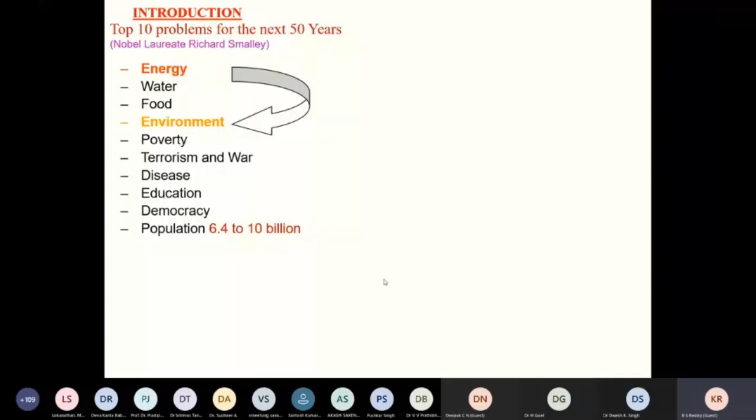So if you look at the future, the first three important things are energy, water, and food. Clean energy is an important aspect. Food is a major issue because the population is growing rapidly, with exponential growth. The required food needs to be produced in the most effective way, and the agriculture sector needs to be strengthened.

Apart from that, water is another important thing. Most water bodies in India are polluted, and even across the world. So potable water is important now. If there is unrest across the world, it could be because of these three: food, water, and clean energy. But for human survival, there's another important requirement: air.

Somehow we get air free of cost. We don't spend money on it, whereas we need to spend a lot of money on clean energy, food, and water. Though air is free, it's not clean air. Because of energy consumption, human activities, industrial development, and increase in population, the environment becomes less conducive for survival. So there's a lot of potential to develop technology to make the environment sustainable, cleaner, or green.

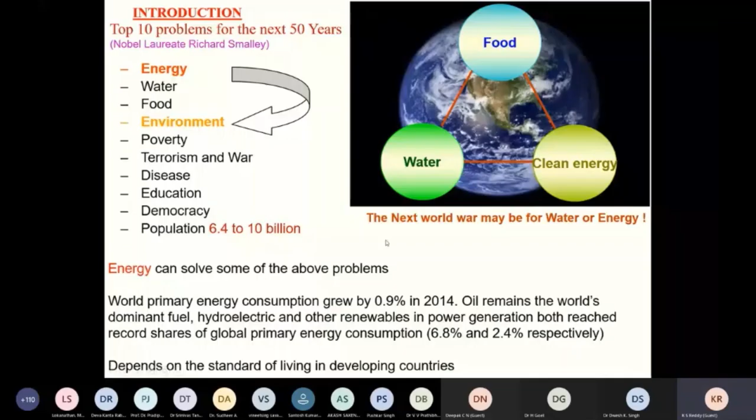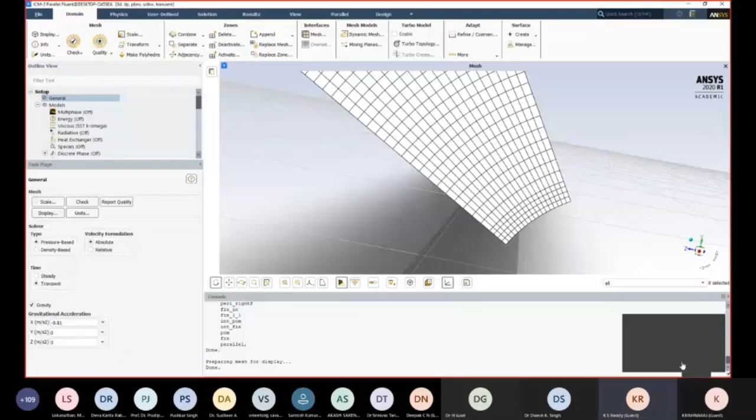Therefore, energy can solve most of these problems. Energy consumption is also rapidly growing day by day, mainly for three reasons: improvement in standard of living, massive industrialization, and population growth. These three reasons are mainly responsible for the increase in energy consumption.

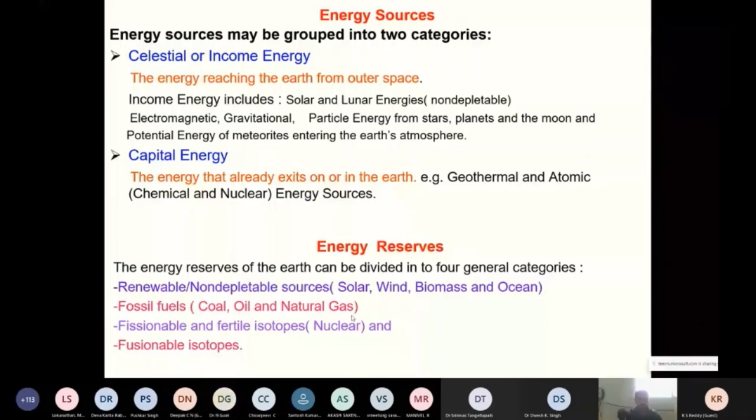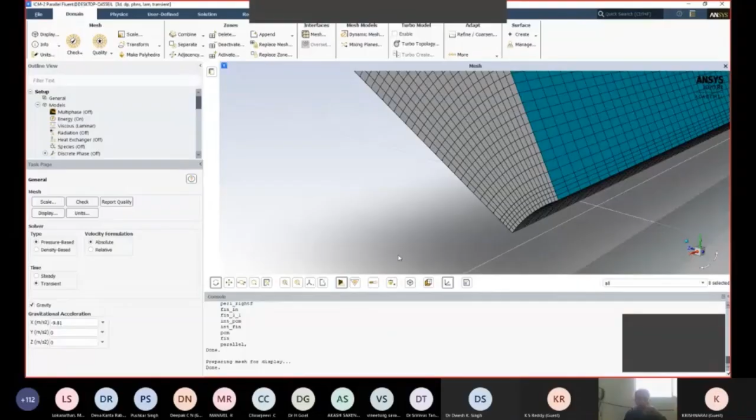If you look at the energy conversion system, which we call the energy system hierarchy, it is transformed into equipment and services. Energy sources, including fossil fuels (oil, gas, coal) and renewables (biomass, solar, wind) as well as nuclear, are transformed into energy carriers, or secondary forms of energy, which are then used for various applications. These secondary fuels or energy carriers include the most efficient forms of energy: electricity and liquid fuels.

So the sources are converted into energy carriers and subsequently utilized in equipment, whether for mobility—surface, aviation, or sea transport—or for buildings. The building sector is also an important area.

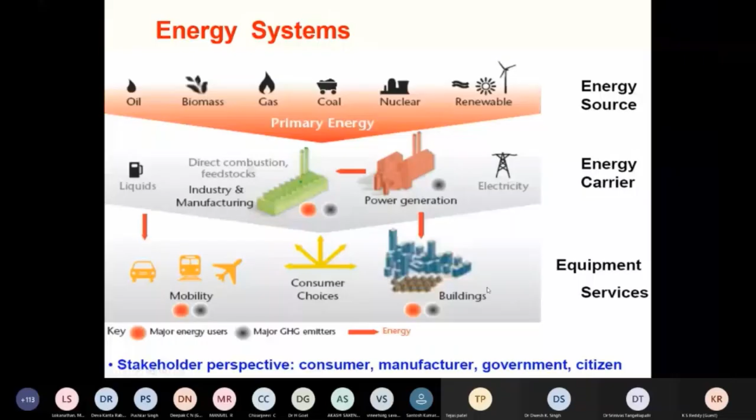If you look at the technological challenges, no single technology or policy can solve everything. There are different problems based on region, resource, market, preference, scale-up, technology, time, and infrastructure. Several challenges exist, whether for vehicle energy efficiency, biofuels or hydrogen fuel for mobility, or zero net emission buildings, since the building sector is also important as far as energy is concerned.

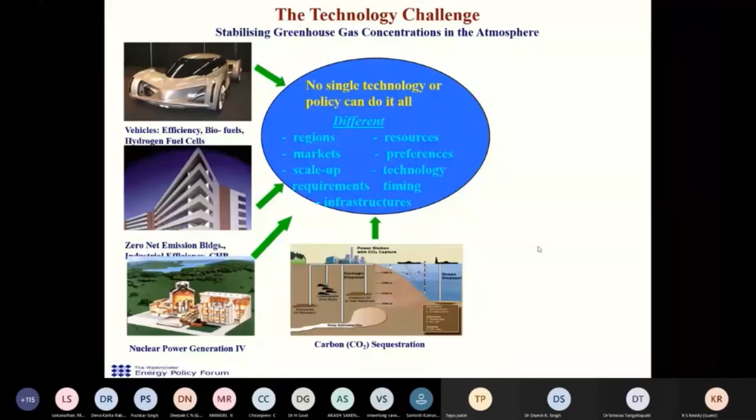So whether we go for industrial efficiency or CHP or any other thing, nuclear is another important aspect where 4th generation, 5th generation nuclear reactors are being developed. Pollution is a major problem, CO2 capture is a major issue, and CO2 sequestration is important. Advanced grids matter because transport, distribution and transmission are major aspects for high quality energy like electricity. Biofuels and power generation is another important aspect, and of course finally the renewable energy technologies.

So these are several challenges, and especially we are discussing the most important aspect, renewable energy technology, mainly solar thermal technologies.

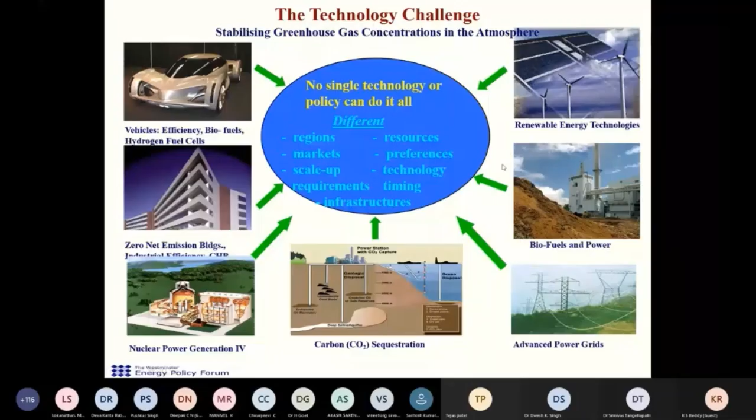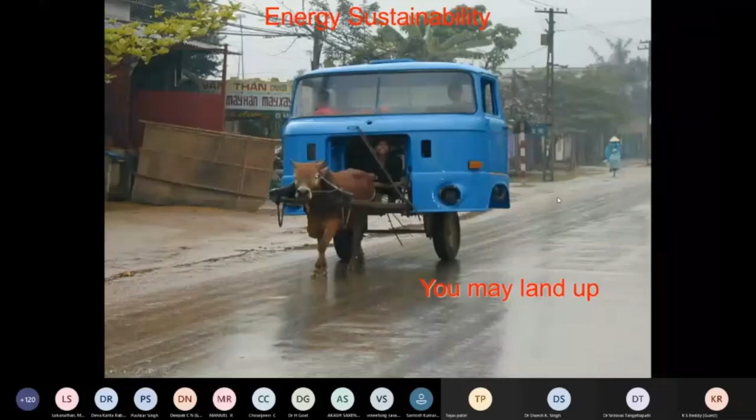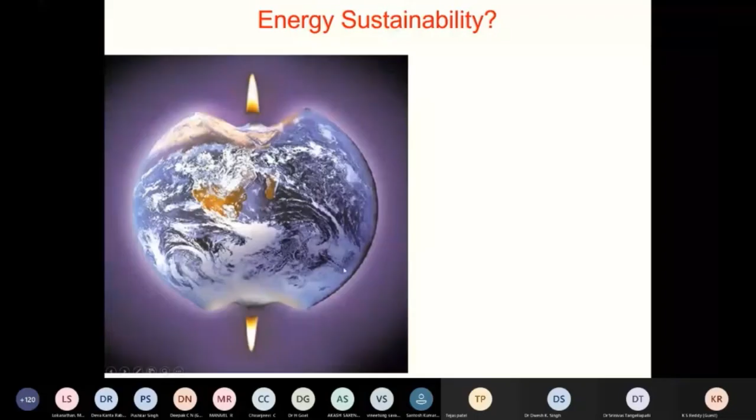Any imbalanced system is because the atmosphere is overloaded with pollutants, which results in imbalance. An overloaded system looks like this. If you put too much pollutants into the atmosphere, we face a lot of problems. So overloading the atmosphere with pollutants may be the same as any overloaded system you've seen on the right side. Therefore, energy sustainability is important because resources need to be used most effectively.

If you see these natural resources, including energy resources, and if you try to consume them like this without technology, they will become extinct after some time. Then this part will become empty, and the future generation will not have any energy sources. So we have to keep the required resources for their use.

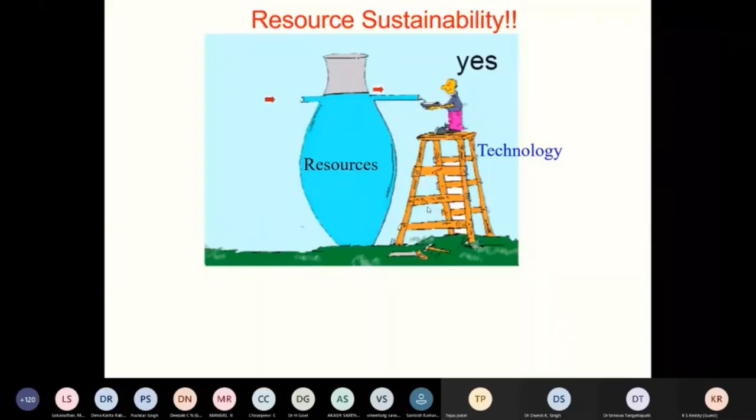It's important to develop an indigenous technology to keep resources for the future generation, and we can use our own share by developing this technology. That's why the future generation says there is only one Earth we have to take care of, please.

If it is energy resources, this technology is renewable energy technology. It's not just a tool, it's a renewable energy technology. You have to develop renewable energy technology in a more sustainable way to take our own share, keeping these reserves and resources for the future generation, and we have to take our own share.

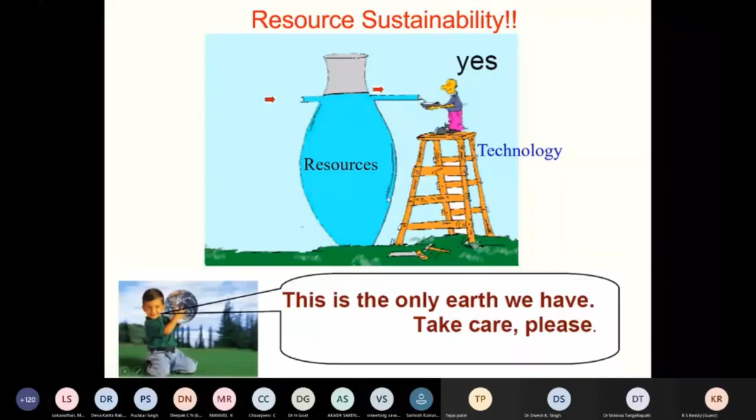If you look at energy reserves, which I have already mentioned, the present annual energy consumption involves fossil fuels - coal, oil and gas - with big blocks, and uranium. Looking at the present energy consumption rate, these reserves are finite. They may become extinct after these many years respectively: natural gas in 63 years, oil in 46 years, and coal in 119 years.

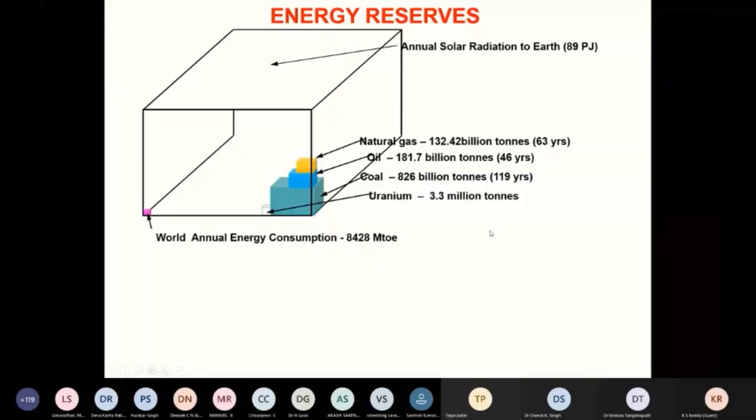Uranium for nuclear power is still unknown and not commercially used to a larger extent. But if you look at the top, there is abundant solar radiation available.

There are a lot of challenges and opportunities here. If you take this, there are three main components: concentrator, receiver, and support structure with tracking. This has to be tracked continuously.

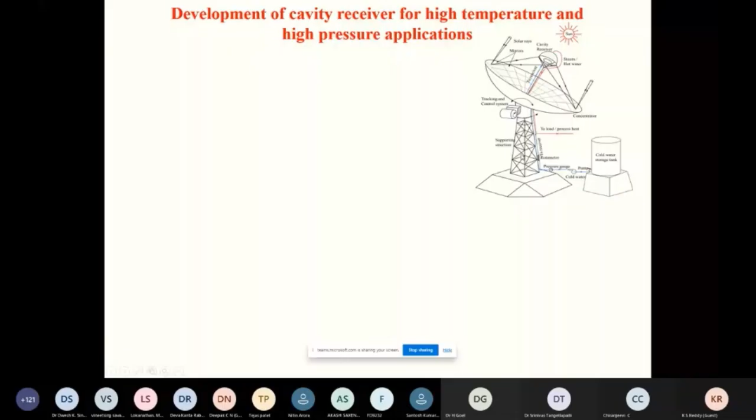The development of a cavity receiver for high temperature and high pressure application is a challenge, but there are a lot of opportunities in this. All CSP technologies, including parabolic collector technology, are most efficient with high concentration ratio and high operating temperatures.

If you look at this, there's a tracking mechanism, a receiver and mirrors, and of course storage tanks. The receiver plays a major role in solar thermal energy conversion and estimation of heat losses.

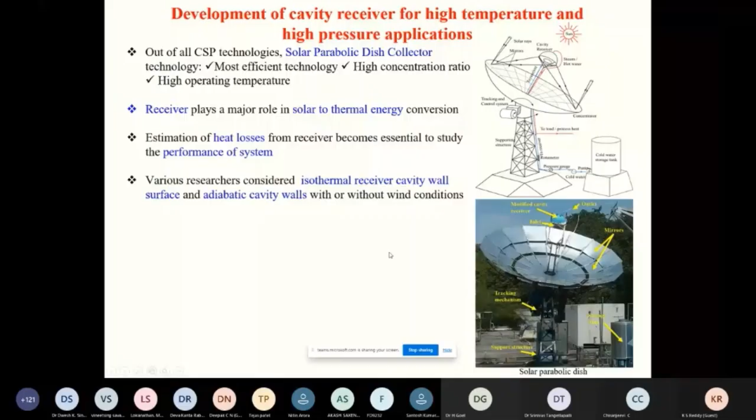The performance study is very important, and various researchers consider isothermal receivers, cavity receivers, adiabatic receivers, and so on. But we have developed a technology which takes care of superheated temperature up to 500 degrees Celsius and reasonably high pressures.

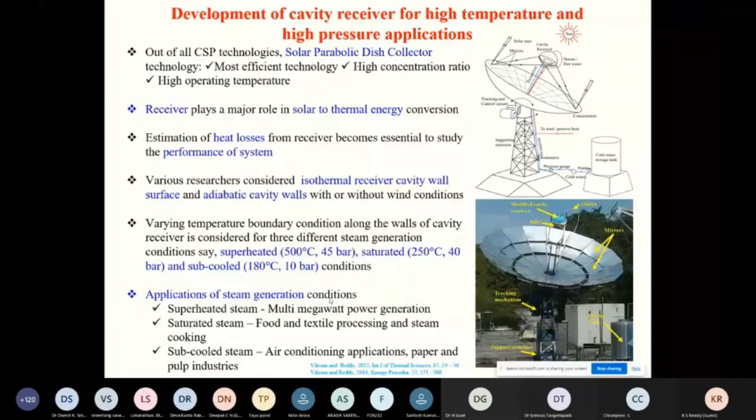We have to discuss this receiver. Development of the receiver is very important, and this receiver for three different conditions has been studied mainly from a heat loss point of view. These heat losses have been estimated with different techniques and so on.

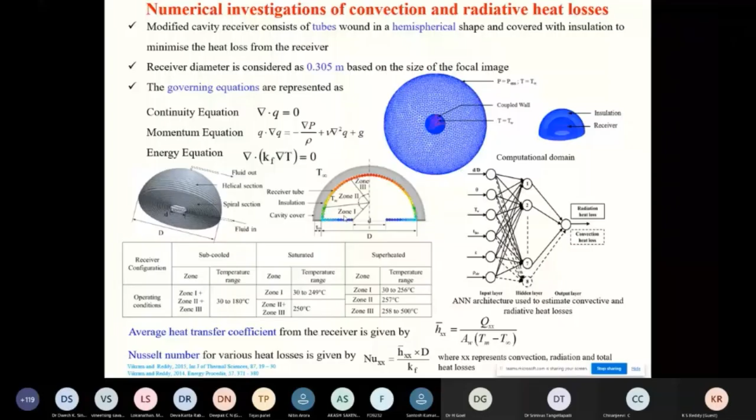We can even use artificial neural networks to find out the different receivers - cavity, semi-cavity, and modified cavity receivers - and when they are oriented in different directions, how the heat losses occur from the cavity.

This has been done with a numerical method by CFD analysis, and it was found that a modified cavity receiver appears to be more efficient in this case. So there are a lot of challenges, and the design and development of a fuzzy focal dish is also very important.

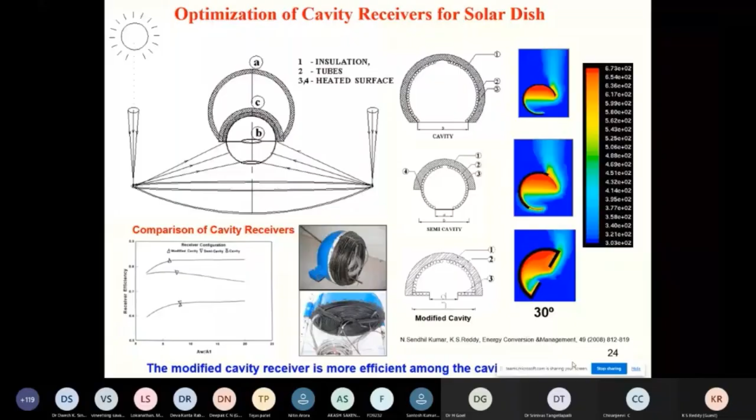We have different dish technologies: namely sharp dish and fuzzy dish. Sharp dish is a very accurate dish, but if you go for inaccuracy, it will give a fuzzy focal dish, and because of fuzzy focal nature, there is imperfect optics involved, so that will have a wider range of focal image.

Those wider range focal images need to be captured by the cavity receiver, and estimating the heat losses for these cavity receivers is very important. The heat losses from these receivers depend on the geometry, orientation, temperature, wind speed, and direction. So we have come up with a comprehensive model to estimate all the heat losses from different orientations, different temperature ranges, and wind speeds. This is the Nusselt number correlation for convection, as you can see.

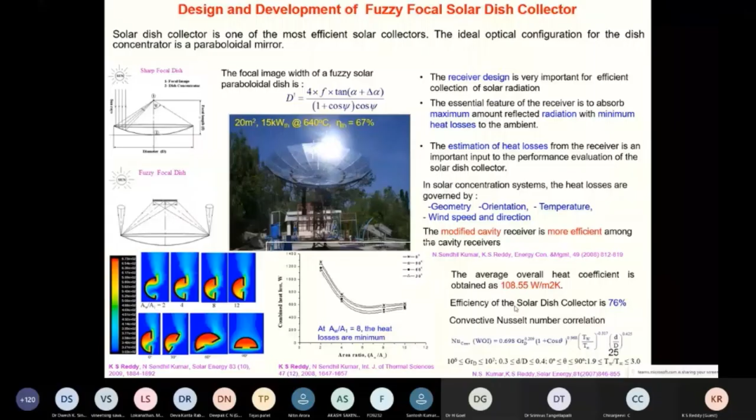If we have this parabolic dish, we have to analyze the problem not only for a single collector, but for multiple collectors as well.

As I mentioned, different correlations have been developed for different conditions, mainly both convection and radiation. These are extensive heat transfer analyses, and the total Nusselt number correlation for different temperatures, the D-by-D ratio, insulation thickness, and other parameters have been studied here.

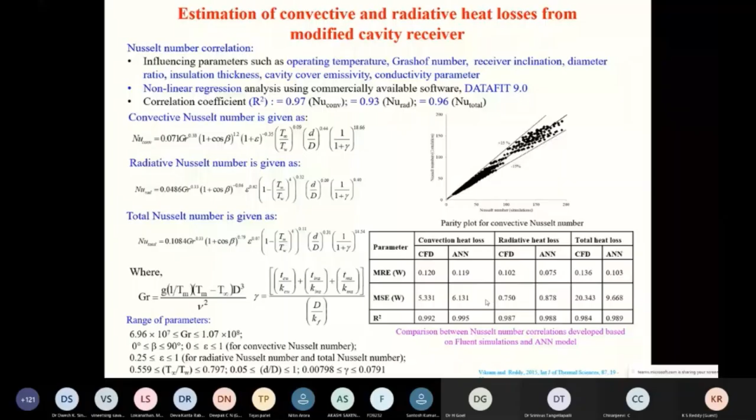We have also used artificial neural networks to come up with these heat transfer coefficients, and they seem to be better compared to CFD analysis, because CFD requires a lot of space, code, and other things. So we can use statistical methods to find out how effective this is.

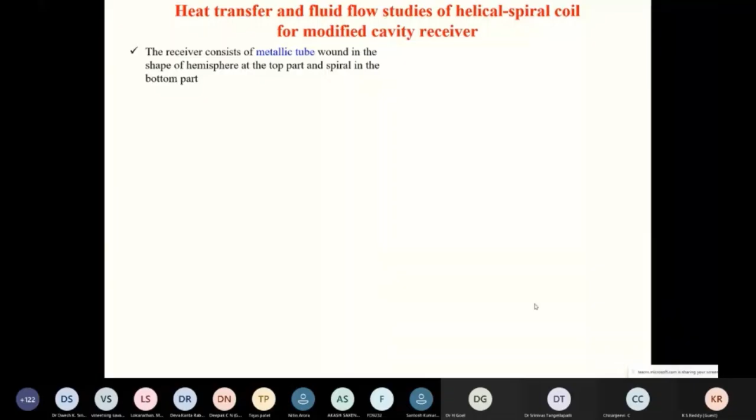Heat transfer and fluid flow studies: here, heat transfer, fluid flow, and the helical-spiral modified cavity look like this. You can find out temperature and all these. There are a lot of challenges here, such as grid generation and boundary conditions.

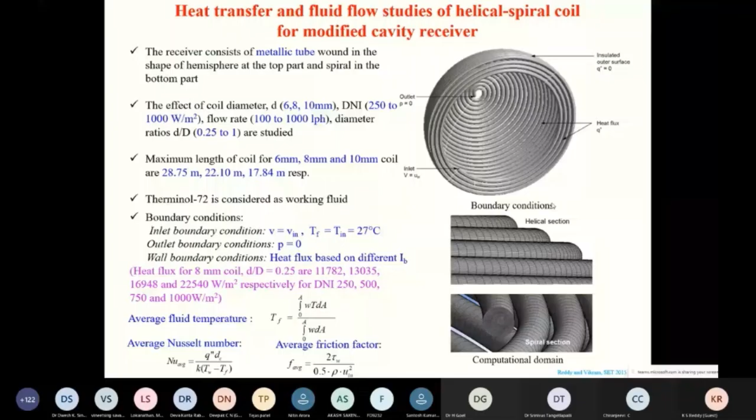We have come up with the average Nusselt number for different sizes of this and different boundary conditions.

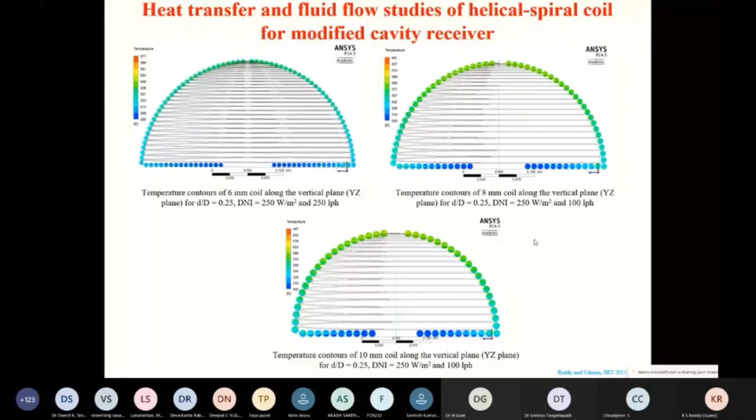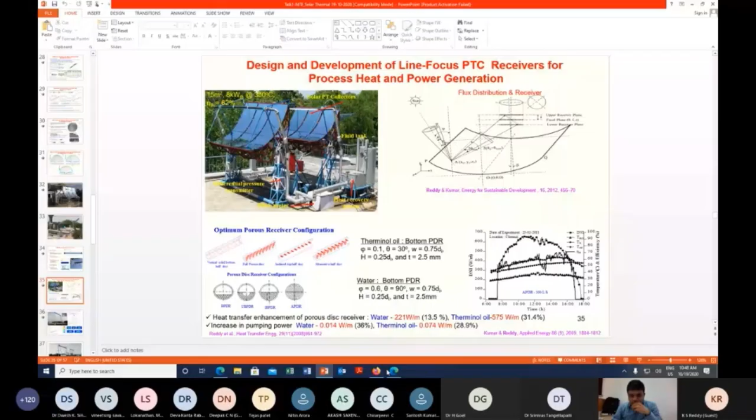Sir, how much cost is it for implementing this parabolic shape antenna? Can you hear me? Yes, sir. So for implementation of such parabolic shape antenna, how much cost will it come to in capex cost?

Capex cost depends on the size, but generally based on the surface area, it's about 10 to 15,000 rupees per square meter. Based on kilowatts, per kilowatt it will be somewhere about 1.5 to 2 lakh rupees. Okay, thank you, sir.

Professor Srinivas, may I ask you something, sir? Yeah, please go ahead. Myself, Professor Goyal, working as a chemistry professor at State Engineering College, Uttaranchal. As a man of chemistry, I am asking you that you are using parabolic reflectors. What chemical are you using as a fluid to transfer the energy?

See, these fluids can be different fluids. They can be anything, but generally for heat transfer, the basic character of the fluid is it has to be cheaper. I'm asking the chemical name of the fluid, sir. Actually, there are lots of fluids which have the capacity to absorb solar thermal energy.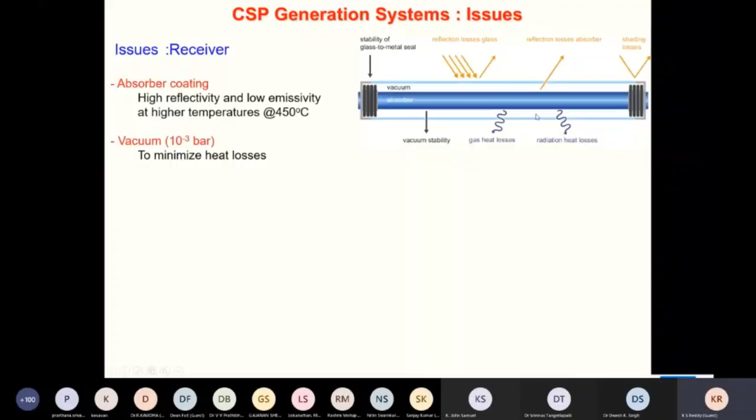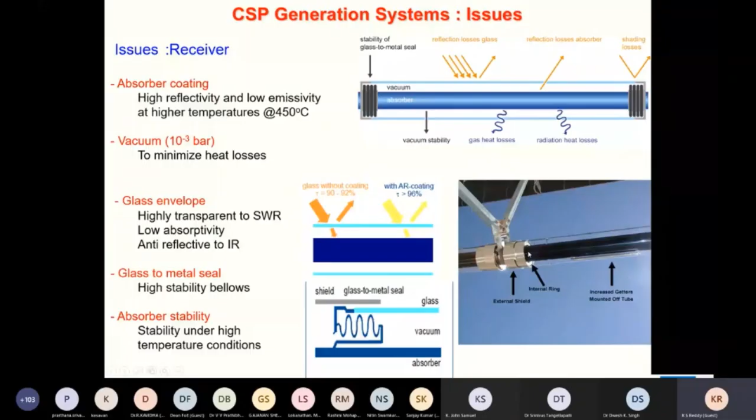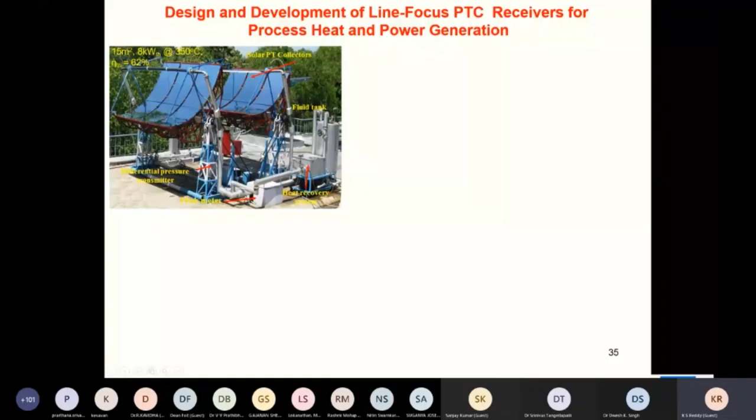One: design and development of a line focus PTC receiver for process heat and power generation applications. You can see two parabolic trough collectors connected in series, and we need to do optical analysis because there are three important components - the mirror parabolic concentrator, the receiver (whether it's a line focus or cavity receiver), and the support structure, because a huge support structure is required, along with a tracking system since we have to track it continuously.

Moreover, these systems are kept under open environment conditions, so they have to withstand wind loads and extreme dust and other conditions. So here it's a two-phase system, therefore the receiver is also very important, and optical analysis is important. Based on this, we have come up with an optical analysis and found different heat transfer coefficients as well as heat transfer rates for different working fluids, and then we evaluate the performance under different conditions.

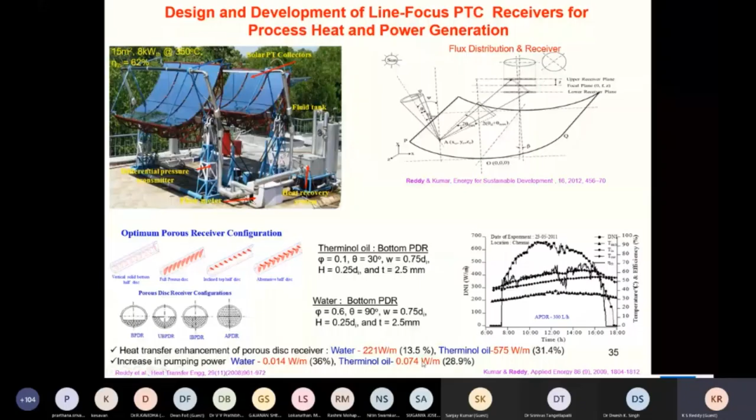The other one is the cavity receivers for LFR, linear Fresnel reflector, because the difference here is that curved mirrors are used in the trough, but here flat mirrors are there. You can see the different flat mirrors - they are tracked independently to focus onto the receiver at the top, which is about 12 meters tall. The radiation is focused onto this, and on one side you send water, and on the other side you get steam like this. Here you can see this concentrated light focused onto this point.

If you look at the optical analysis, the different mirrors are focusing the concentrated solar radiation here, and the receiver is a cavity, an open cavity, with trapezoidal conditions.

Hello? Sir, continue. Yeah, okay sir.

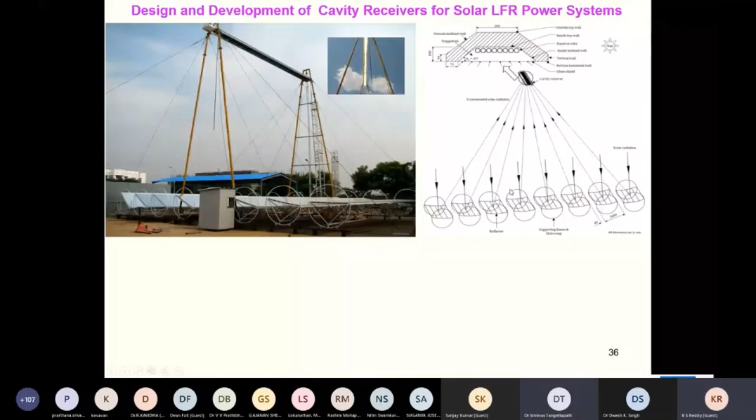So you can see that this will have several heat losses involved, whether it's conduction, convection, and so on. That is the problem, and we can find out the heat losses in these receivers and determine the different aperture angle, aspect ratio, and so on.

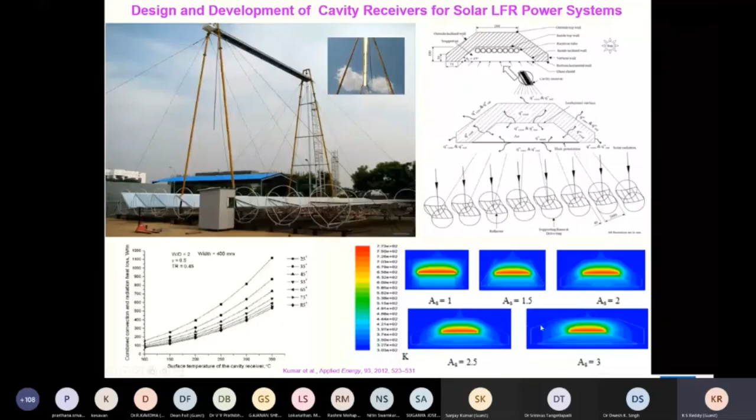This is a system we installed in a school, Pathashala, which is 70 kilometers from Chennai in Kanchipuram district, with energy storage. Here these are the energy storage units - I'll discuss energy storage later in my talk.

This system can produce cogeneration, and I think Dr. Srinivas is going to cover the polygeneration aspect. So this is the cogeneration and trigeneration aspects we have explored. Cogeneration means both heat and power, and polygeneration means heat, power, water, and air conditioning. In fact, we produce steam and use it for process heat in the kitchen, as well as for this school's air conditioning aspects.

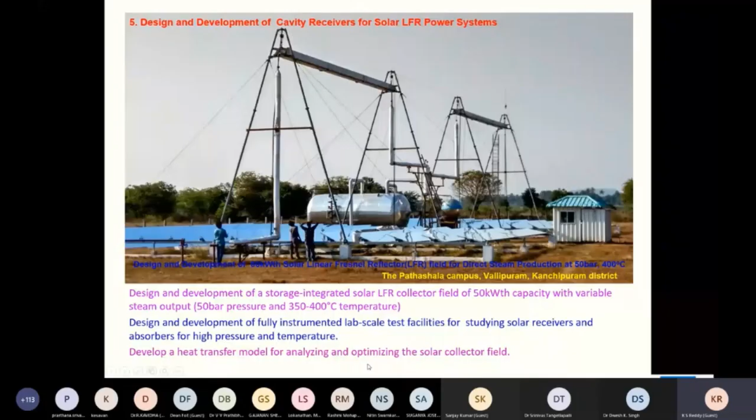So it produces about 50 kilowatts at 350 to 400 degrees Celsius, and now we have gone up to 500 degrees Celsius. You can see the flux distribution and how the receiver looks like, and a lot of optical, thermodynamic, and heat transfer studies have been carried out, which are available in open literature. You can see some of my papers if you are interested in this.

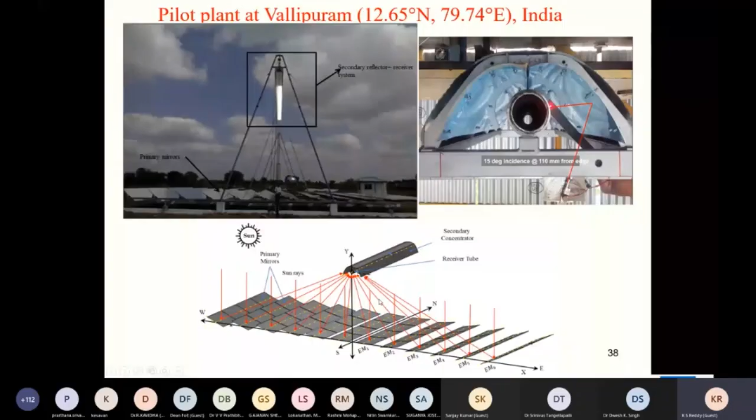Again, we have to do heat transfer analysis with computational three-dimensional heat transfer. The computational domain is this, and there are a lot of challenges here in how to get the flux distribution and so on. So we have to take it lengthwise, because the wind flows from one end to the other. There are different types of wind conditions - whether the wind comes onto the receiver or away from it, or from the side, bottom, top, or anything.

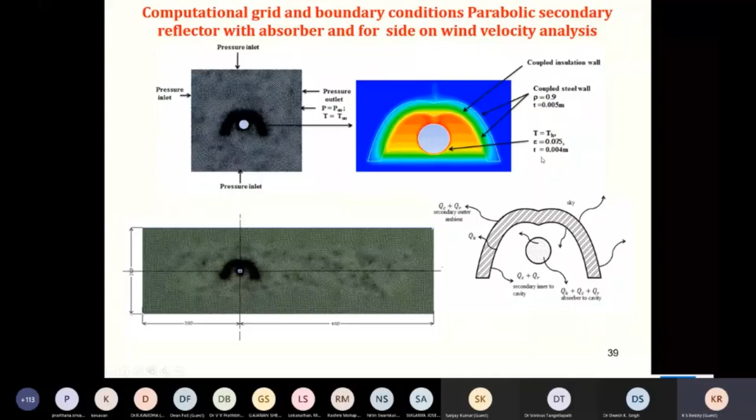We call it head-on wind, side-on wind, and back-on wind. These are winds that need to be considered, and we have to find out how the stratification of temperature within the cavity receiver needs to be estimated in order to design the receivers.

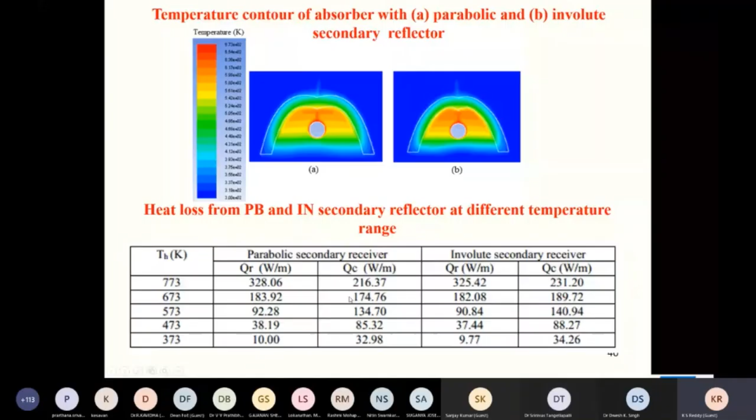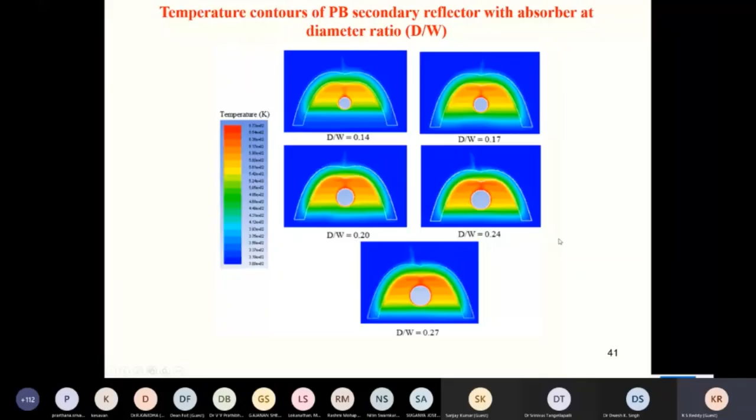These are some of the aspects of the receivers, where the diameter of the tube relative to the width of the aperture is important. If you go for a higher ratio, there will be higher losses. If you have a lower d by w, you will have other problems like aperture issues. So we fixed d by w at about 0.17, and then wind effects have been considered.

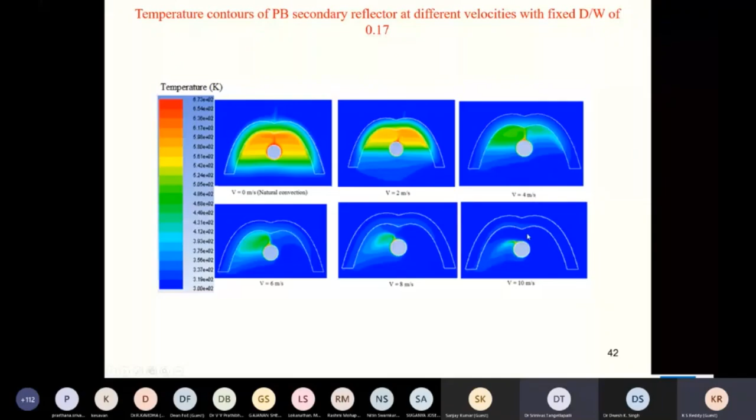If wind is flowing in this direction, we can see how the flux distribution changes. With no wind, it looks like this. At 2 meters wind speed, there is some disturbance. At 4 meters it looks like this, coming from this direction. At 10 meters, most of the heat is taken away by the wind. You can see the temperature distribution and streamlines for different theta angles.

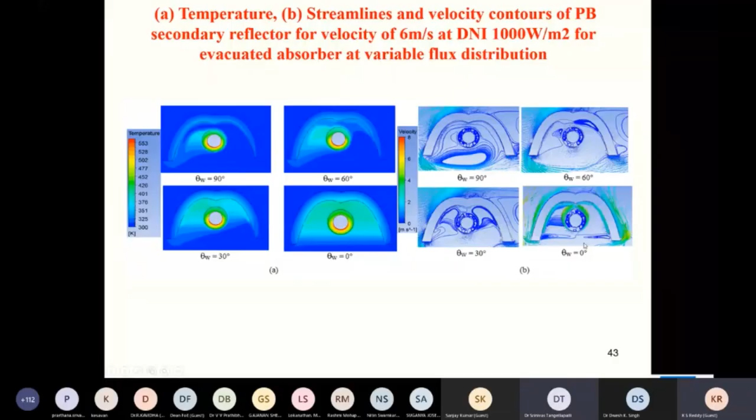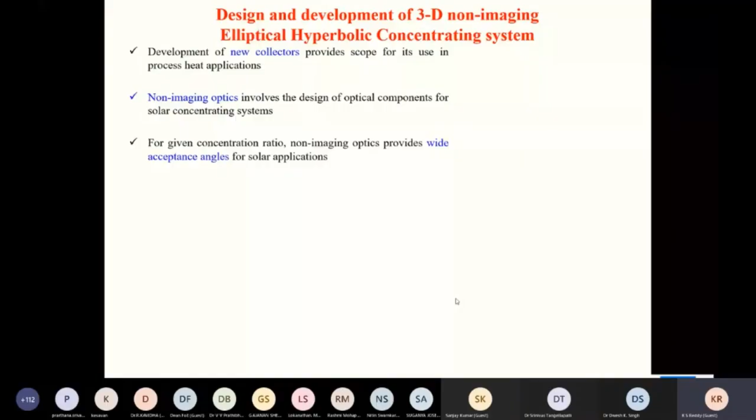Another concentrator is called a three-dimensional non-imaging elliptical and hyperbolic concentrator system. This is a new type of concentrator where the aperture is elliptical and the surface is hyperbolic, and there is again a surface cavity receiver here.

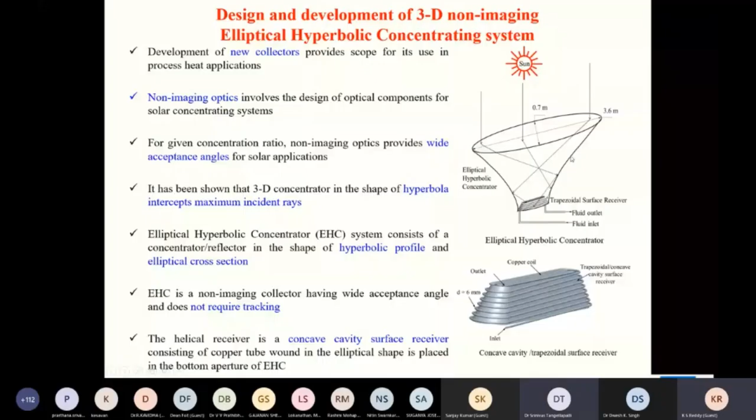We need to study heat transfer from this. If you look at it, the front view is like this, the side view is like this, and the receiver is placed at the bottom. This is a trapezoidal, inverted trapezoidal structure for surface receiver.

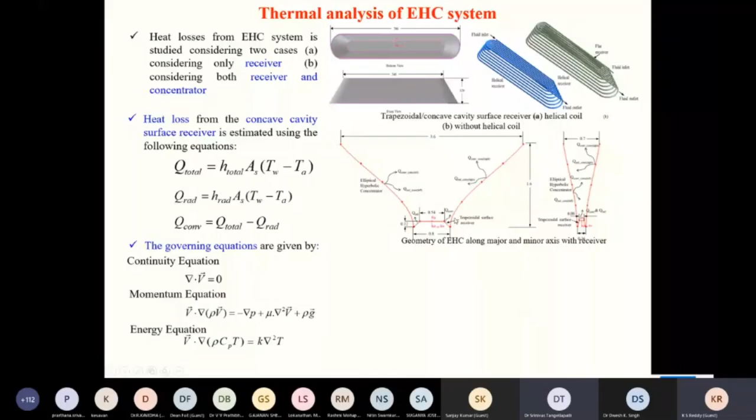We will find heat transfer from both surfaces, taking a computational domain for CFD analysis, showing how the flow within the concentrator as well as the receiver behaves, and how the fluid flow and heat loss occur from these.

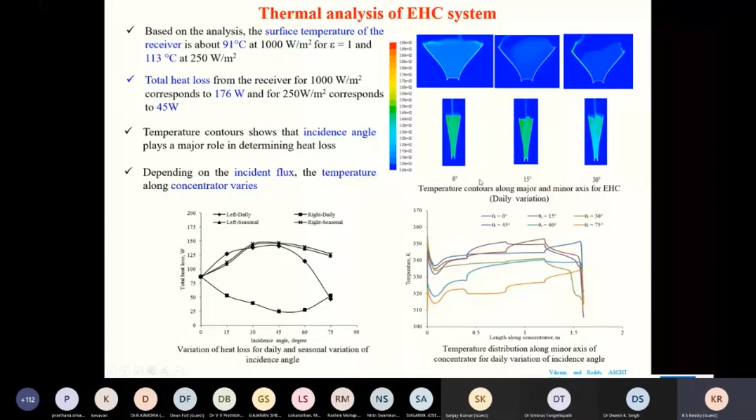There are numbers here I won't go into in detail, depending upon the emissivity and so on. With different incident angles, the total heat losses involved have been estimated. There is also the temperature variation along the length of the concentrator, studied for different theta angles.

Experimentally, they look like this. We have developed two elliptical concentrators, and this is the receiver. You can see the helical receiver placed at the bottom, facing this way, so they are coupled here, and these are some of the characteristics.

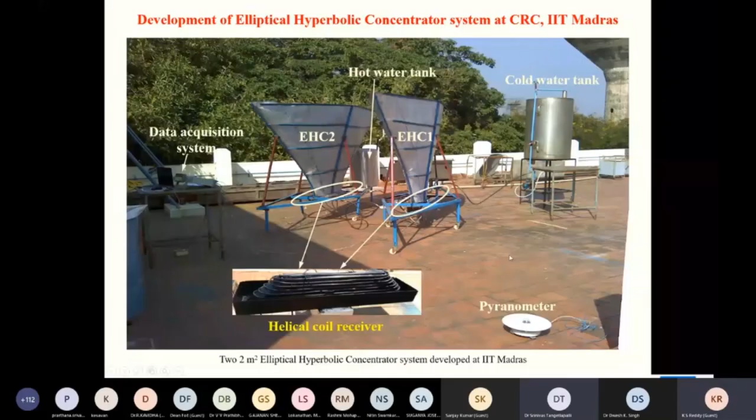Another thermal system is this desalination system, where solar energy is converted into potable water from seawater. This is a multi-stage desalination system where heat is added, allowing better yields of about 15 to 25 kg per meter square per day, with 40 to 60% efficiency.

It can handle this. We have estimated yield at different stages like this, using different feedstocks such as saline water, brackish water, fresh water, and brine. This system can be used not only for generating potable water but also for treatment of wastewater.

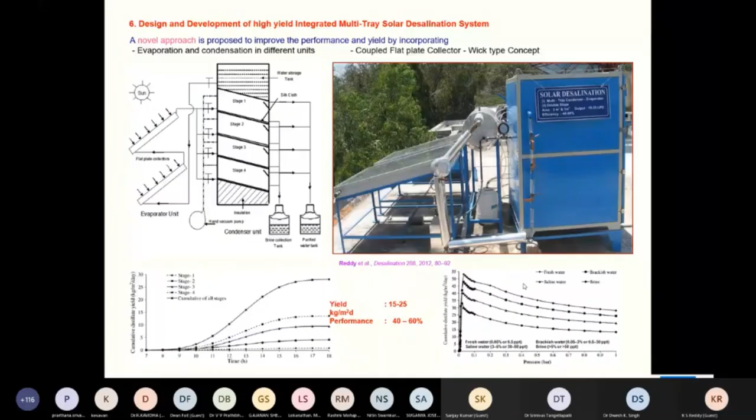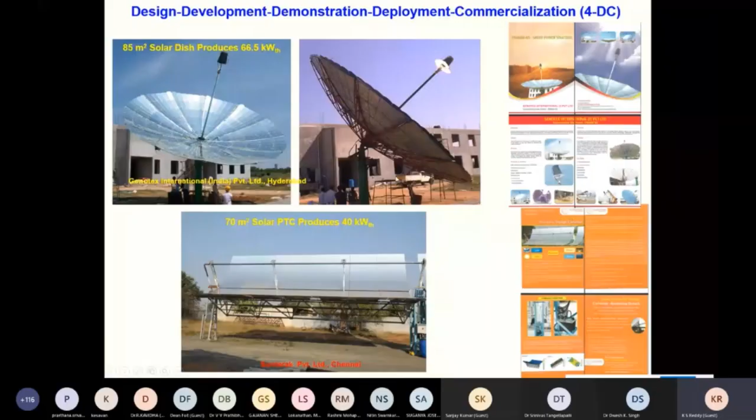And these are our dishes. We have developed 6th generation dishes. This is the 3rd generation dish; what was shown earlier was the 2nd generation. This is a parabolic trough, and you can see the linear Fresnel reflector producing steam from such a massive reflector, which is then expanded in a turbine. One of our industrial associates has taken this forward and installed large-scale concentrating solar power plants.

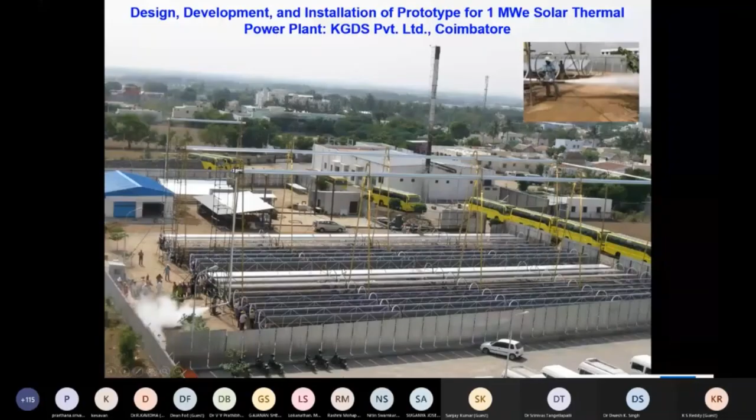As I mentioned, the desalination system can be used not only for seawater but also wastewater. A lot of industries pollute water, and that pollutant can be treated. The pollutants have to be treated before they're rejected into the atmosphere. So we considered a typical textile effluent plant, where a lot of effluents are rejected into the atmosphere and agricultural land.

This is in Thirupur in Tamil Nadu. We have installed one such system, and it has shown better potential. The Tamil Nadu Planning Commission wanted to install this in different industries, because treatment is a major challenge, and the cost of textile production is going up substantially, making them uncompetitive internationally, since Bangladeshi textiles compete with them.

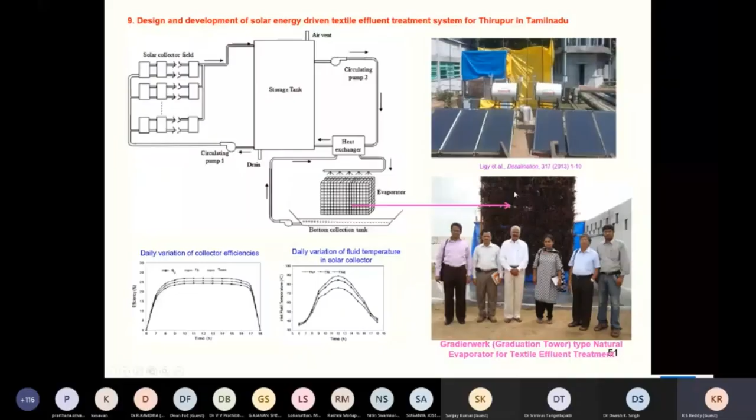So that's the problem. Based on that, we've also developed zero discharge toilets, installed in our hostel—Krishna hostel in IIT. It covers both desalination and drying, and these panels are used to pump this. At the bottom there's a separator. It's hermetically sealed—a zero discharge waste toilet, meaning neither liquid discharge nor solid discharge. Everything is controlled.

We transferred the technology to a Mumbai-based company. They are planning to implement it. They have already installed one or two, but they may implement it elsewhere also.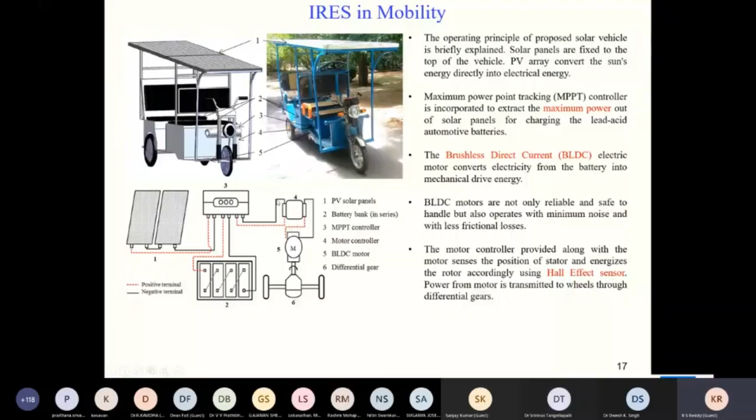Another thing is the integrated renewable energy system, called standalone Integrated Renewable energy System, IRES. You can combine not only solar energy but also biomass with a biogas digester.

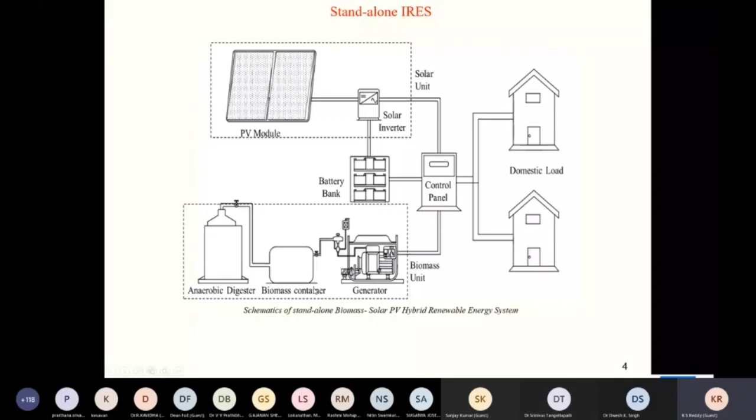This system we installed in Shantiniketan, which is Vishwabharati University, Rabindranath Tagore's place in West Bengal. This is working—it supplies energy to a tribal village behind it, 24 hours, using biomass as well as solar. You see solar panels on top, and inside it looks like this.

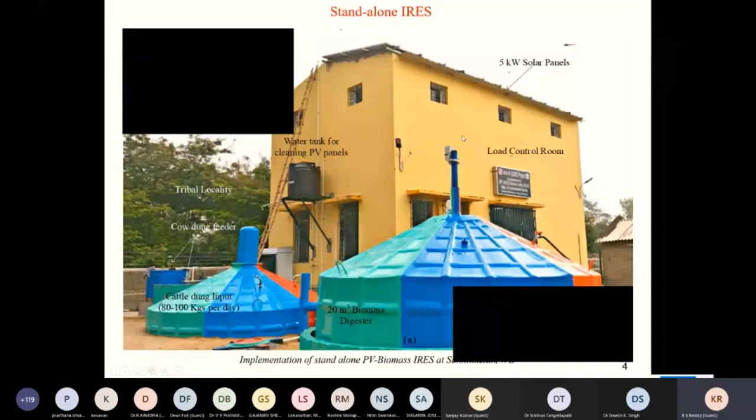The biogas is fed to the biogas generator, which produces electricity. Electricity is connected here, with some battery storage, and of course solar panels also produce electricity which is stored. The combined integrated energy is supplied to the village.

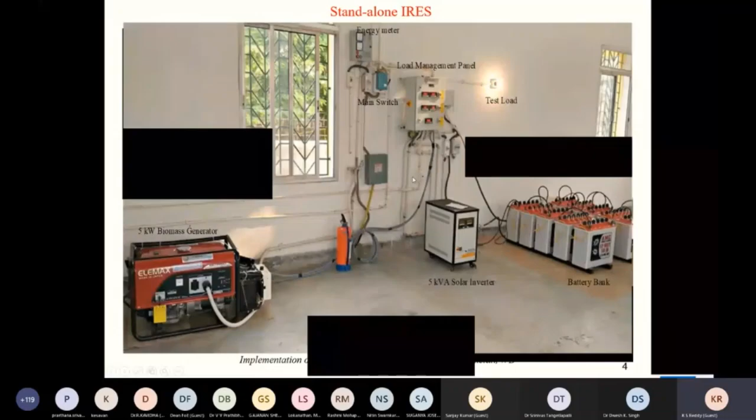This is similar to that system. If some grid is there, we can also connect to the grid. In some locations grids are present, so we have developed a control system with a grid.

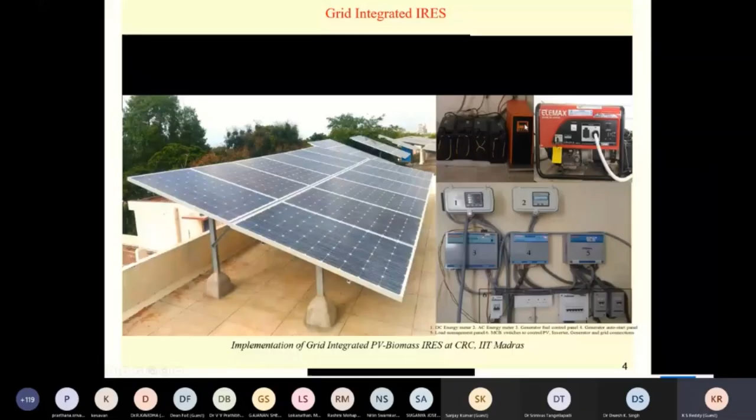The auto I showed earlier was also compared with conventional autos, and it proved to be better from both an economic and environmental point of view, with a reasonably good payback period and lower emissions.

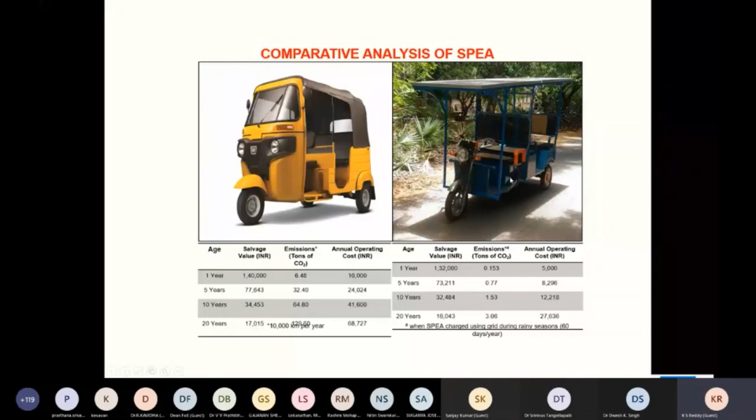So with this, you have seen several solar thermal energy conversion technologies and associated solar energy technologies developed at IIT Madras. With this I'll close the first talk, based on challenges and opportunities in solar energy conversion, where optimization of the energy system for sustainable development is done using analytical, numerical, and statistical tools—mainly neural networks for statistical, CFD for numerical, and first law analysis for analytical.

Optimization of the concentrating collector system is very important for predicting heat transfer characteristics, designing an efficient receiver, and viable solar energy systems for both process heat and other applications—there's a lot of potential for process heat, mainly in textile industries, dairy industries, tanneries, and water production. Our approach is a 4DC approach: design, development, demonstration, deployment through commercialization, because some of our technologies have been taken to market by our industrial associates and commercialized.

Behind me is my third generation dish, and this is a fourth generation dish. There's also a fifth generation dish from another company. I'm unable to show some of those because a lot of IPs are involved, and we have also filed patents on that, so we cannot reveal those to the public. That's why I have not shown the next generation dishes here.

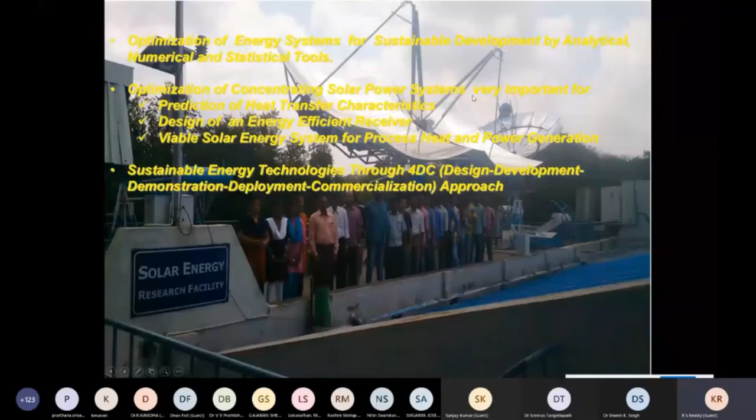This person is eagerly looking at you for some questions quickly, and otherwise we'll start the next talk.

Thank you, sir, for giving light on challenges and opportunities in solar thermal energy. You shared the computational results and experimental results with case studies, and also thanks for sharing some innovative designs in the shape of elliptical and hyperbolic shapes. Now I request the participants, if any questions on this topic, challenges and opportunities of solar thermal energy.

Dear participants. Hello sir, good afternoon sir. Good afternoon. Sir, how is concentrated photovoltaic different from photovoltaic?

So you know that the photovoltaic panel, photovoltaic. Yes. What is the efficiency of that? Do you have any idea? The efficiency is very less, about 10 to 15, 20% maximum.